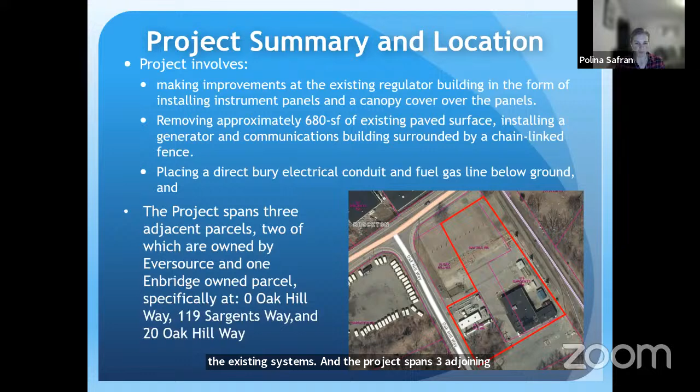The project spans three adjoining parcels: 0 Oak Hill Way, 119 Sargents Way, which are owned by Eversource, and 20 Oak Hill Way, owned by Enbridge. The work is proposed within the 100-foot buffer zone to bordering vegetated wetland only. A small portion of the work is located within the locally regulated 25-foot buffer zone and no-touch zone, and there are no other resource areas within the project area — no riverfront area, no floodplain, no priority or estimated habitats, or vernal pools, certified or potential.

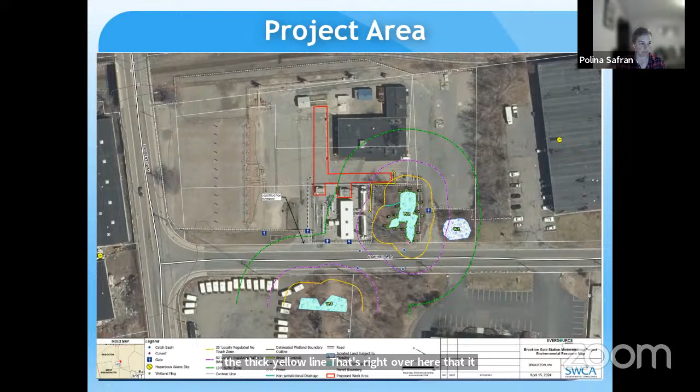The construction entrance will be right over here, which is the main entrance to the facility. And the thick yellow line right over here depicts the erosion controls that will be installed prior to the start of work and will remain there for the duration of the project.

So like I said, the project consists of three main components, and I'll briefly go through each of them. The first is the installation of the instrument panels on the southern side of the Eversource regulator building, located inside the fenced-in Enbridge facility. This work is between the 50 and 100-foot buffer zone, and it qualifies as a minor buffer zone activity. The black box right here is the location where the instruments will be installed.

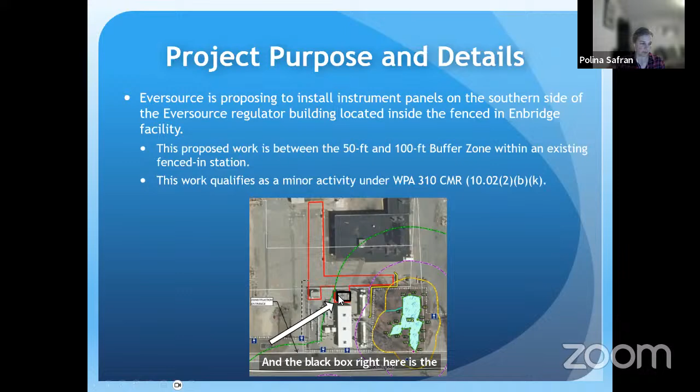The second component is the installation of the generator and communications building. This will involve Eversource saw cutting approximately 20 feet by 34 feet of existing pavement and excavating it. They will be excavating the area using a vacuum truck, which works exactly how it sounds — it sucks up all the soil into a big container, and it'll be hauled off site. Then the area will be backfilled with about 4 feet of crushed stone wrapped in geotextile fabric.

On top of that stone, they will be installing two concrete pads, a 9x4 pad for the generator and a 9x9 pad for the communications building. To protect the generator and communications building, a chain link fence will be installed surrounding the entire crushed stone area. After the installation of the slabs, the total area converted from impervious pavement to pervious crushed stone is about 563 square feet. The black box right here on the map depicts the approximate location of this work.

And the third component is the installation of the pipeline and conduits from the newly installed generator and communications building to the existing Enbridge and Eversource facility located north. Didn't have room for the location, but it's essentially everything else that's right over here. Most of that is within the 50 and the 100-foot buffer.

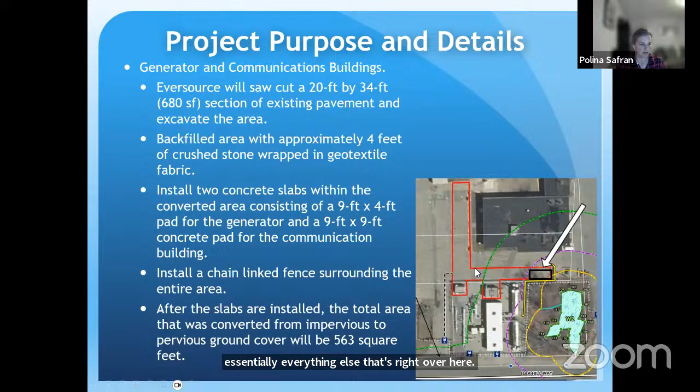The way this is going to be installed is using the open trench direct bury method, which is excavating the trench, about 10 feet wide, 4 feet deep. All soils will be removed using a vacuum truck and hauled off site immediately. Pipe will be laid and joined and then backfilled with clean sand and fill.

No more than 80 to 100 feet of the trench will be open at any time, and usually the trench is filled and area repaved at the end of each workday. If for some reason the trench needs to remain open, steel plates will be placed on top of it. And the proposed trench is outside of the 25-foot buffer.

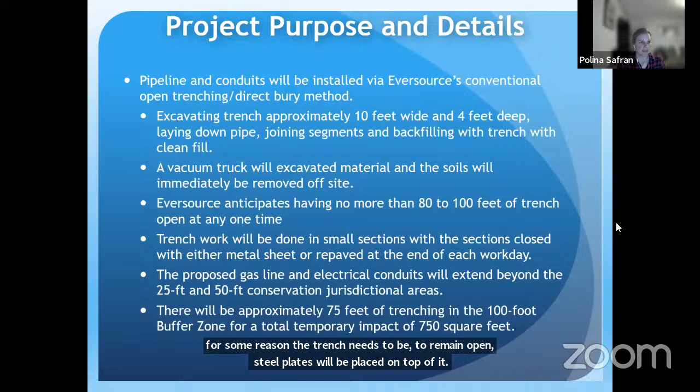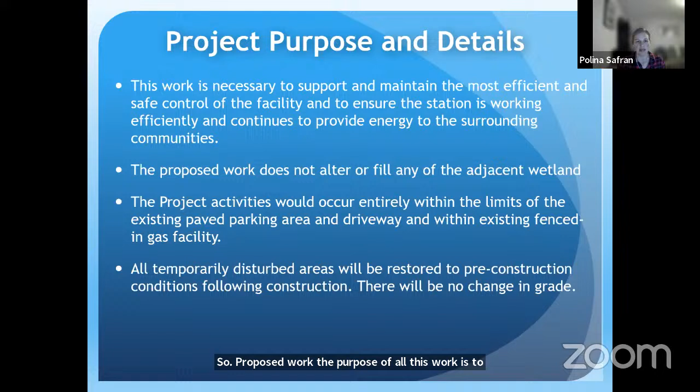So the purpose of all this work is to support and maintain the most efficient and safe control of the existing facility, and also to ensure that the station is working efficiently and continues to provide energy to the surrounding community. Eversource has carefully designed and sited this work to avoid and minimize impacts to the resource area to the greatest extent possible.

Multiple locations were considered, with this proposed location selected as the best alternative because it allows for the safest access to the equipment and fulfills the egress-ingress requirements.

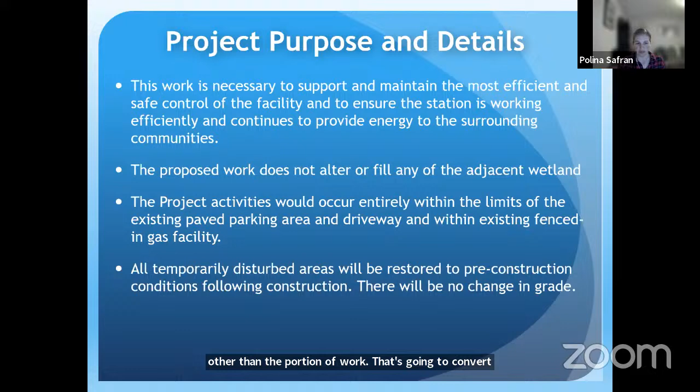The proposed work will not alter or fill any wetlands. All work will occur within the existing paved surfaces within the existing fenced-in facility. There'll be no change in grade, no tree removal, and other than the portion of work that's going to convert pavement to gravel, all other temporary disturbed areas will be restored to pre-construction conditions.

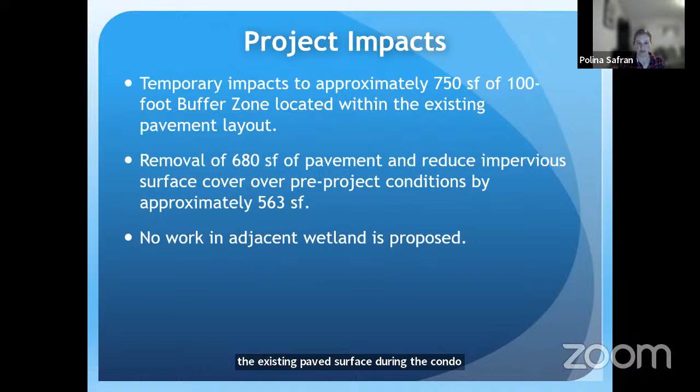So the summary of project impacts: there will be about 750 square feet of temporary disturbance within the existing paved surface during the conduit installation, and there will be the reduction of existing impervious surfaces on site by approximately 563 square feet.

Because the project proposes the conversion of impervious paved surfaces to pervious crushed stone, this project is subject to the Massachusetts Stormwater Standards, which we addressed in the narrative. It's important to note that the project will not result in an increase of impervious area, nor will it result in any grade changes.

And as proposed, the project will reduce impervious surface cover by about 563 square feet, which will be an improvement to the area and will benefit the nearby wetland that currently receives overland flow from the paved surface.

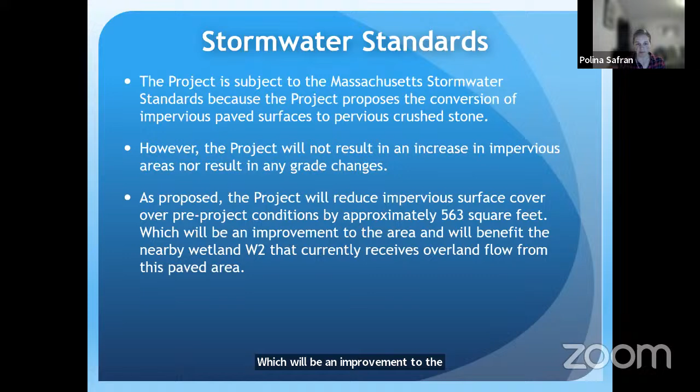So here are the engineering plans depicting the work. As you can see, this small corner right here is within the 25-foot buffer. This is the only corner where it is, and this corner consists of the removal of pavement and replacing with gravel. There aren't any conduits within that 25-foot, or no other work within this 25-foot buffer.

This kind of cross section right here, this is all trench work for the conduits that will be repaved back to existing grade.

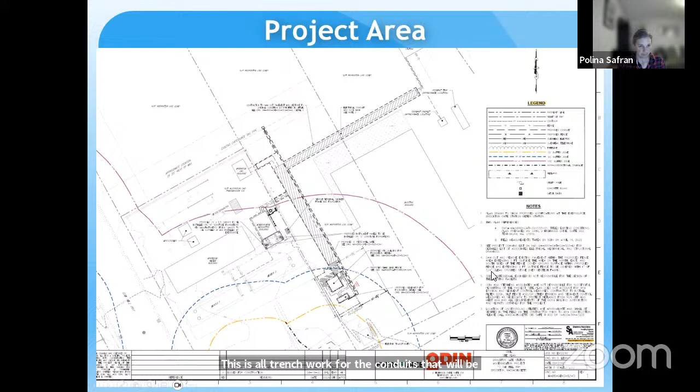Here are some photos of existing conditions. The top left photo is the area where the pavement will be removed. I tried to outline it with the approximate location with that black box. There is an existing fence line surrounding all three parcels, and this fence line will not be touched. It'll be left in place.

The bottom left photo is another view of where the pavement will be removed and generator installed. Erosion controls are proposed along the fence line, so along right here and down here, to protect the wetland. The top right photo is a view of wetland W2 that we keep talking about, and the bottom right photo shows the main entrance to the facility that will be used as the construction entrance.

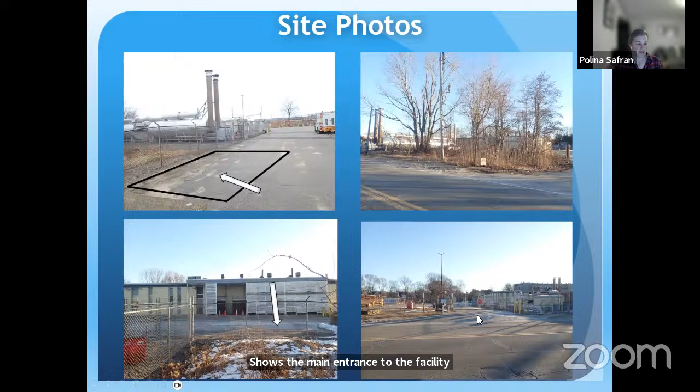So during the duration of the project, best management practices will be applied. Erosion controls and catch basin inlet protections will be installed prior to commencement of work and will remain in place until the disturbed areas are all stabilized and everything's repaved.

There will be no work beyond the erosion controls, no storage of fuels or overnight parking of vehicles within 100 feet of wetlands. And if dewatering is necessary, it will be located greater than 100 feet from any water body and outside of the wetlands.

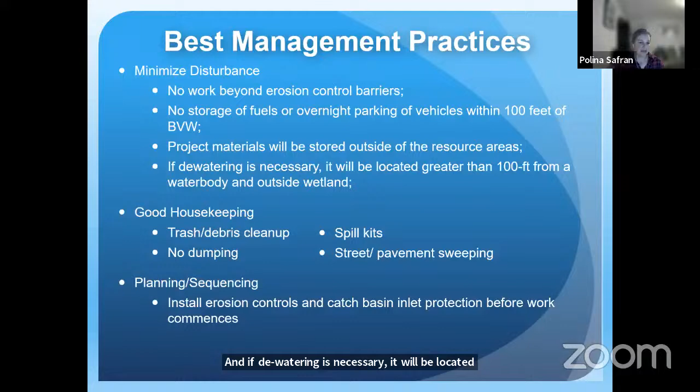And like I said, other than the conversion of paved to gravel, all other disturbed surfaces will be restored to pre-construction conditions, so paved over, same grade. In addition, SWCA will be performing weekly environmental compliance inspections throughout the duration of the project to monitor construction activities for compliance with jurisdictional resources and throughout the site to make sure there's compliance.

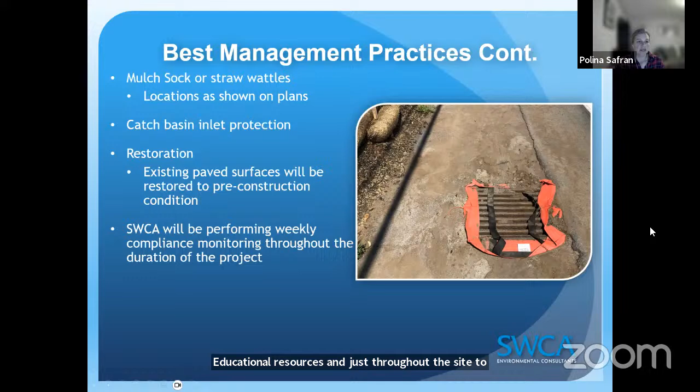So Eversource is hoping to begin this project as soon as possible, hopefully in the spring, and we anticipate it will take about 4 months to complete. Again, best management practices will be implemented for the duration of the project, and all work will be accessed and performed from the existing driveway and pavement layout.

All work will occur entirely within the limits of the existing paved area and the existing fenced-in gas facility, and the project will fully comply with the Wetlands Protection Act. Just a small portion of the proposed work is located within the 25-foot no-touch zone, but it will consist of converting impervious paved area to a pervious one that will promote groundwater recharge. So Eversource is seeking an order of conditions and a waiver pursuant to the Brockton Conservation Commission filing requirements and regulations for this project.

And I know I talked a lot. I tried to fit it into the 15 minutes. So please let me know if you have any questions or if you want to see any slides.

Oh, no, you did great. I also forgot to mention before opening up that I just wanted to confirm that an abutter notification and Mass DEP file number was on file. Yes, we did receive an abutter notification. Proof the abutter notifications were sent, and Mass DEP did issue a file number along with some technical comments about the stormwater report. We can get into that in a minute.

Okay. All right. And any questions for the commission members? I have a question. What is a geotextile material? Yep, so it is a fabric that can allow water to filter through, but it also, if there's any sediment, it kind of captures the sediment, so the water that filters through is fairly clean.

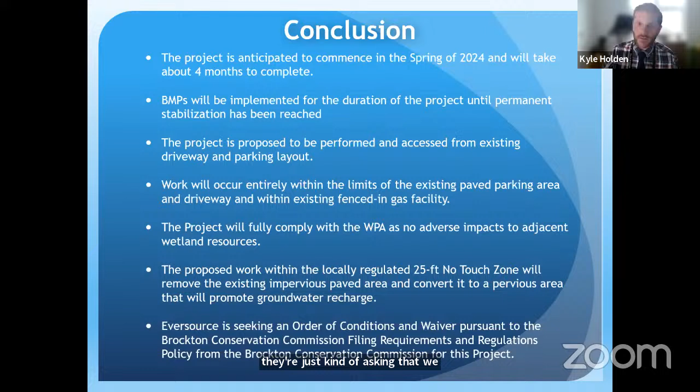So one thing that Polina kind of referenced was at the very end, they're seeking a waiver for one of the local filing requirements. Normally with a notice of intent filing we require the applicant provide the green municipal lien certificate from the city, basically saying there are no outstanding taxes or debts that have accrued on the property. Because this project site comprises two parcels owned by Eversource and a third parcel owned by a different party, they are not sure if they can legally disclose that information, so they're asking that we waive that requirement for this filing. I addressed that in the agent report, and I think there's no problem with that if the commission's comfortable with that.

DEP did issue some technical comments. Basically, DEP stated that the applicant didn't submit the proper documentation for a stormwater report signed by a registered professional engineer. I spoke to someone at DEP about this comment, and they said it's kind of a gray area because there's a low impact as far as we're converting existing impervious to pervious area, and we're not installing anything new. This is classified as a redevelopment project rather than a new development, and they're not installing any new stormwater features.

Whether or not a stormwater report is technically required, it's not included here. The applicant did include a whole section in their application going through the stormwater standards, which is normally what would be included in the stormwater report. So there's kind of a gray area here if the commission is comfortable issuing the order of conditions without that stamped stormwater report, if you are willing to accept the stormwater management practices that were included in the notice of intent application. If the commission does choose to issue an order of conditions, there's always the possibility that Mass DEP will review this and issue a superseding order of conditions if they think the stormwater report should have been included. But again, that's up to the commission's discretion.

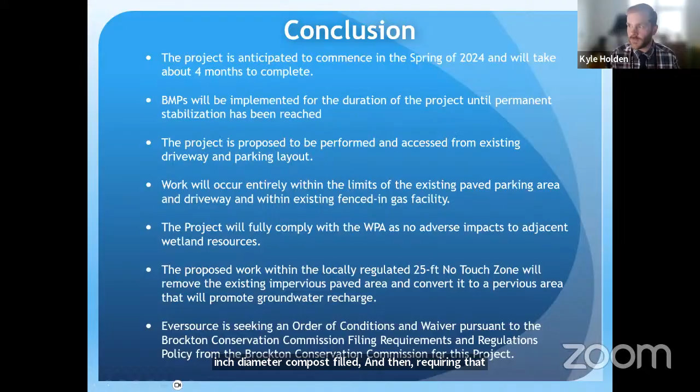Those are at the bottom of the agent report, detailing the type of erosion control. The notice of intent application leaves it up to the commission, so I've stated what we would want: a 12-inch diameter compost-filled biodegradable silt sock, and requiring that the applicant provide the Conservation Commission contact information for their environmental monitor who will be on site every week. And finally, that we're not confirming the wetland boundaries for wetlands W1 and W3, just the BVW wetland W2. That's all I got.

Okay, commissioners, any thoughts from you guys? I have a question for Kyle on the stormwater requirement. Any feedback from you guys? I have a question for Kyle.

I thought I just read recently that we should not be issuing notice of intents if there are still issues that have to be addressed. Did I read that memo wrong?

You may be referring to that document that we just approved earlier tonight. One of the things that's always been a part of the filing information and regulations is that the commission will not issue an order of conditions pending receipt of any additional material. So if they have to provide an updated map or other documentation, it's written into the rules and regulations that the commission will not issue the permit or order of conditions pending receipt of any material. So that's kind of what you may be thinking of. I'm not sure, does that sound right?

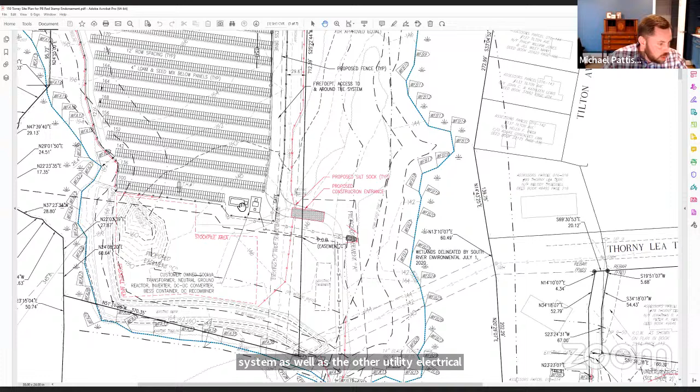As you can see here, in this area there are 2 concrete pads on which the battery system as well as the other utility electrical equipment will be mounted. As you see, there's a small access - there's a 20-foot wide gravel access road right here. Maintenance access would be along this access road here. There's a locked gate off of Thorny Lea Terrace.

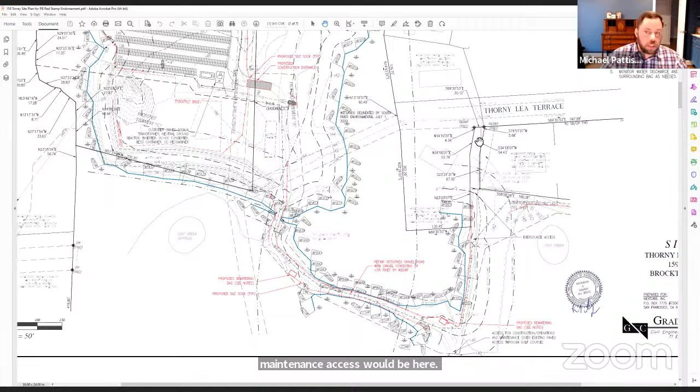So, excuse me, maintenance access would be here. Per the Zoning Board of Appeals, all construction access is going to be through the golf club's cart path from off of West Street. And I can scroll down to that. So here's West Street here. Part of the country club's cart path is here, and it comes west and then up north through it to connect with the property over here. Excuse me, I apologize.

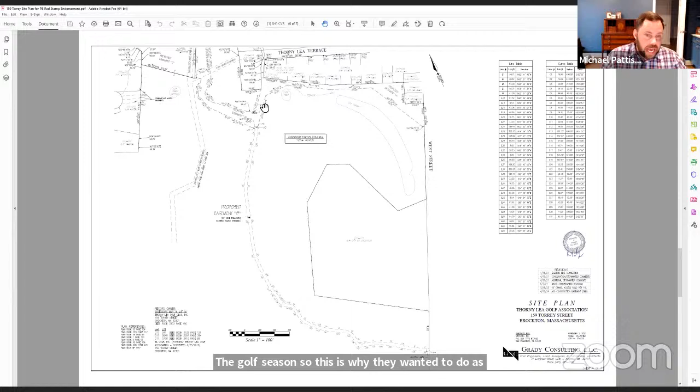As Kyle stated, the country club does not want us doing any type of construction work during the golf season. So this is why they want it done in winter, because all construction vehicles have to access through their golf cart path across their property.

Okay, back to the first page. So as you can see, there is wetlands basically surrounding the property. We are within the 100-foot buffer zone. We are outside of the 25-foot no-touch area.

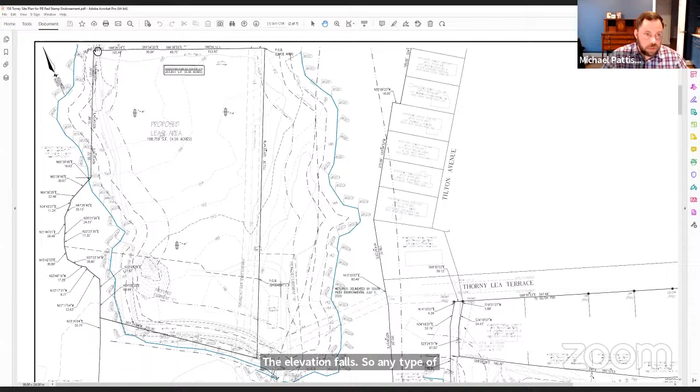Important to note that the elevation falls from the northwest down to the southeast, so any rainwater would flow that direction. In this area there is an existing berm on the southwest that follows the southern side, and currently the water directs into the wetlands.

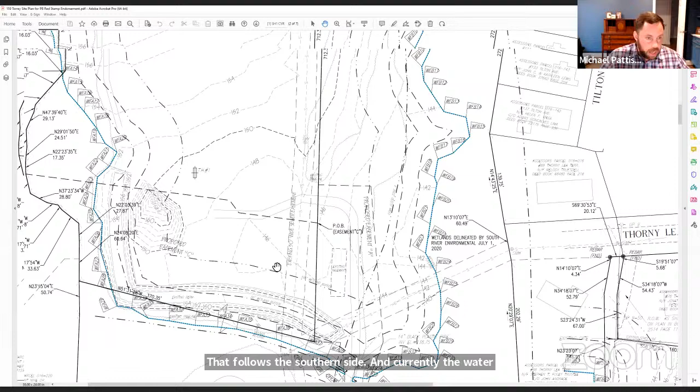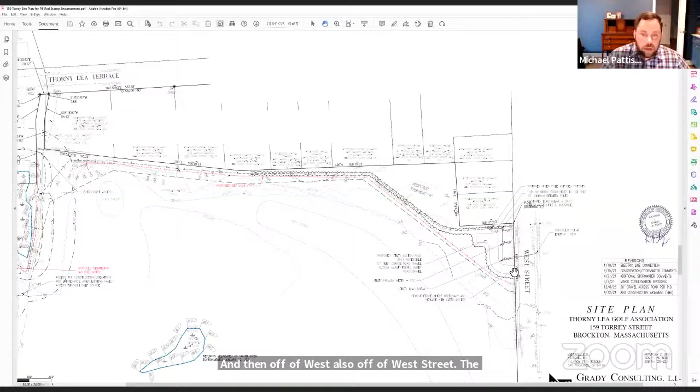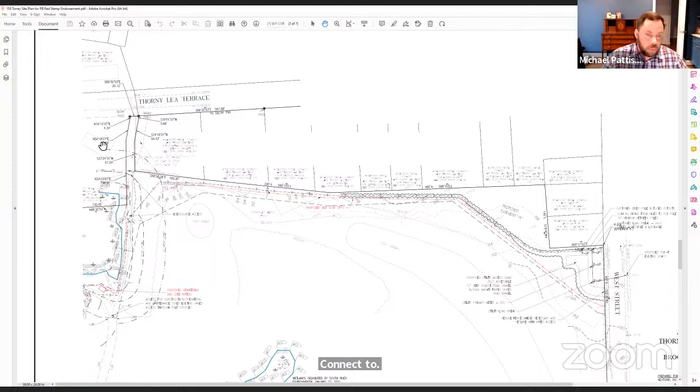Off of West Street, the utility connection would come across part of the country club's property, along the border. It'll be underground from West Street, with multiple poles in this area, then underground along the perimeter of their property to connect to the solar array. So all power created will be diverted from there to the grid.

Okay. Is there any questions I can answer? Any other questions from the commission members? I have a couple questions. One question I had, just because I was curious.

You mentioned there's an existing berm. What is the berm made out of? I believe it's just an existing dirt berm. My understanding, from aerial views, is it looks like a hill covered in grass and other vegetation.

Okay, and then so you mentioned the solar arrays will be ground mounted. Could you talk a bit more about the process of mounting the solar arrays and how that affects the grading and the ground?

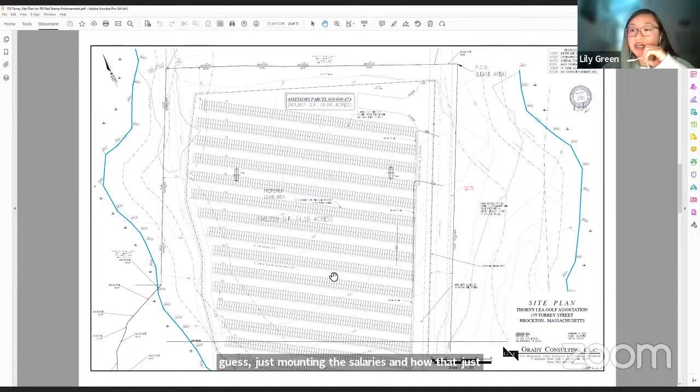My understanding is, and I apologize, I have my engineer here. If he could raise his hand we could give him access, he'd be able to talk about the civil work. Rick, could you raise your hand so they can see you? Yeah, I'm promoting him right now.

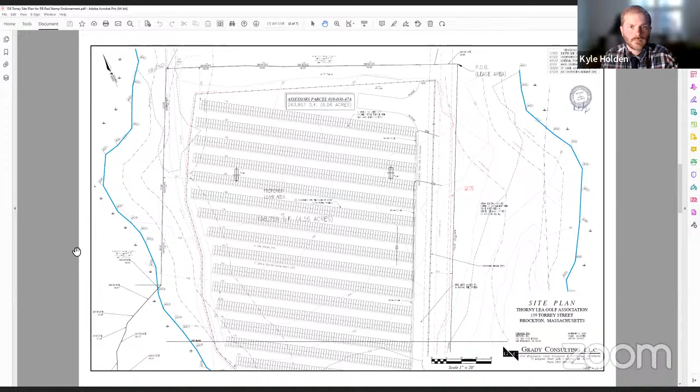Okay, all right, he may be having some difficulties. I know he was at another hearing somewhere else, so he's currently sitting in his car in a parking lot trying to access the meeting.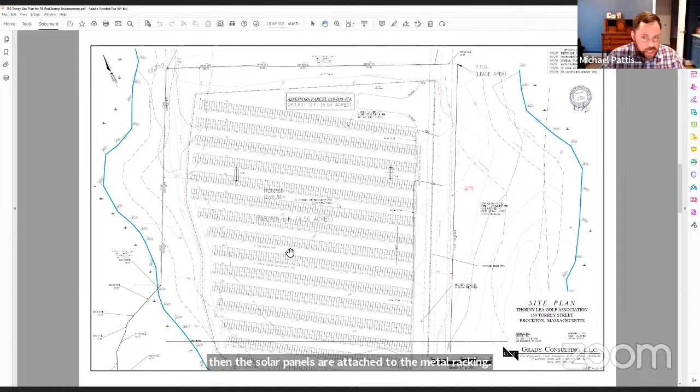So I apologize. Usually what happens is they dig boreholes and insert concrete piers into the ground, then attach a metal racking system connected across the property, and the solar panels are attached to the metal racking. Regarding grading, I believe it's quite limited—we're trying to disturb as little of the area as possible.

I may be on here now, Mike. Is this working now? Hey, there he is. Sorry about that. Oh, no worries.

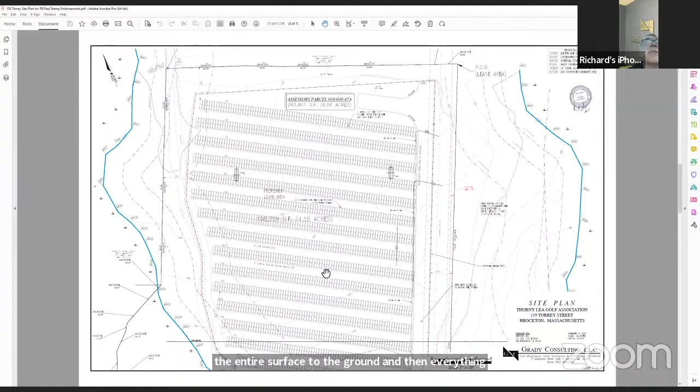As Mike mentioned, we're not making any drastic changes to the existing grade. We do want to scrape off some of the loam to put in the connections to the ground, and everything gets covered with crushed stone over the entire surface. We also carve in a couple of drainage basins. During the review and approval 3 years ago, we submitted stormwater calculations demonstrating no increased runoff for the 2, 10, 25, and 100-year storm events. We did provide attenuation with some storage and infiltration on site.

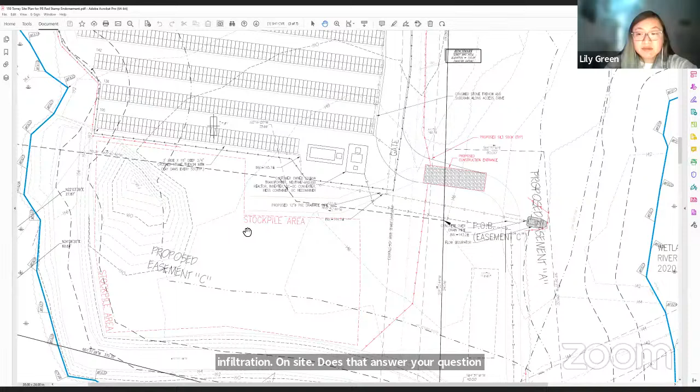Does that answer your question? Yes, thank you. You're welcome. Are all commissioners satisfied with the responses we've received?

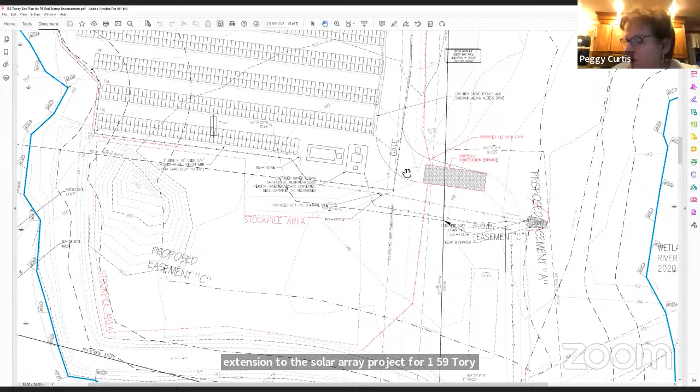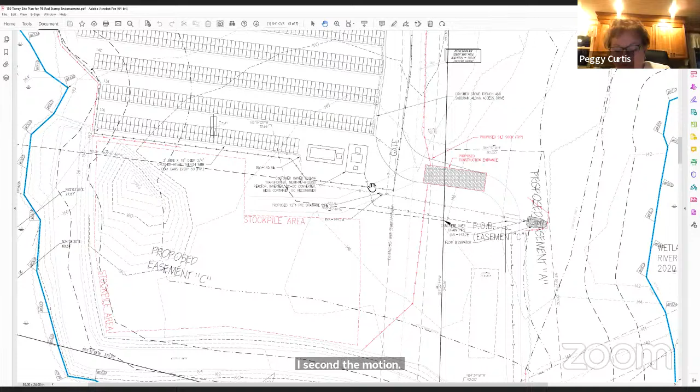So I'd like to hear a motion to provide a 3-year extension to the solar array project for 159 Torrey Street. I'll make a motion—plus it went right out of my head—to do a 3-year extension for 159 Torrey Street. I second the motion. Roll call vote please: Curtis, aye. Green, aye. Map, aye. Clay, aye.

So Kyle, the 3-year extension would just be till 2027, correct? Yeah, that sounds right. Okay, 2027.

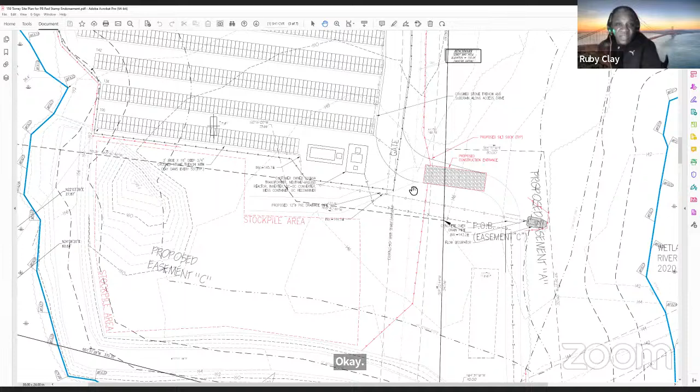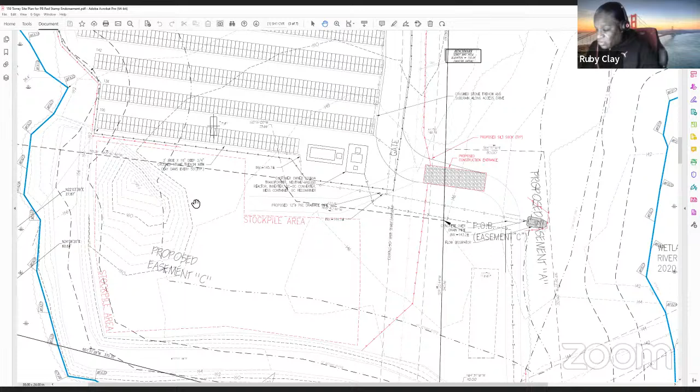So now, oh yeah, so number 5 is extended to the May meeting as well as number 6. So I think now we're at 7, the ANRAD for 0 Toby. Yes, that's correct.

All right, hold on one second, let me just get myself together here. And the confirmation that abutters are notified and all that—this is a continuing matter, right. Okay, right, so we've already done that when this was first opened last fall. Yep, and I know one of the engineers is here from W Engineering, so I'm going to go ahead and promote Evan.

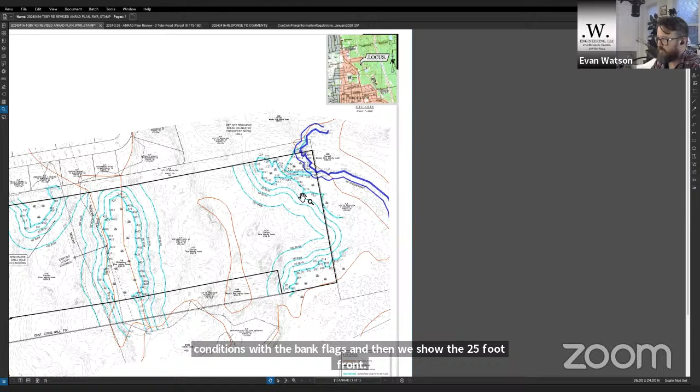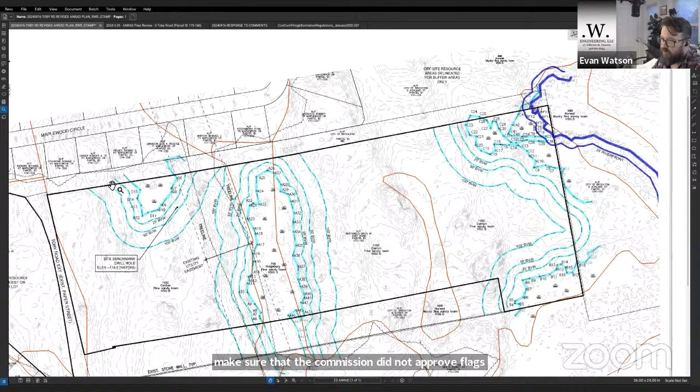So Beta had a few comments. First, they wanted to make sure the commission did not approve flags that were off the property. So we've revised the plan to show those flags in grayscale to help with that, and I think they had a recommendation of which flags not to include.

Another thing they asked us to look at was this ditch in the D series over here. DEP brought it up as well, however it's off the property, so if we delineated it, it wouldn't be approved anyway since it's not on the property. It's not a perennial stream, and there's no riverfront associated with it—it would just be an intermittent stream within a resource area.

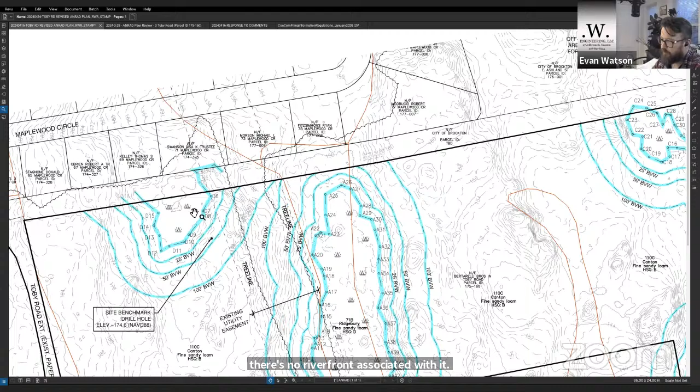The other spot they mentioned was a small ephemeral flow here at C33. Again, it's within this BVW, the C series, so delineating that wouldn't necessarily increase the limits of the resource area delineation. They recommended the commission cite in the ORAD that it exists but wasn't delineated because it's within the resource area anyhow.

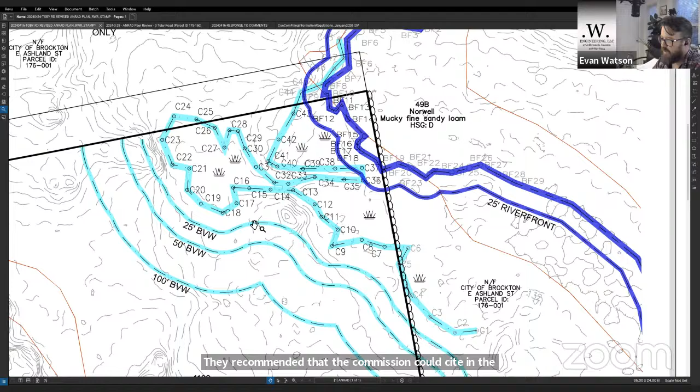I think they also mentioned there was some standing water somewhere in the A series that may or may not be a potential vernal pool. They recommended the commission note that it has not been evaluated, which we're fine with as well.

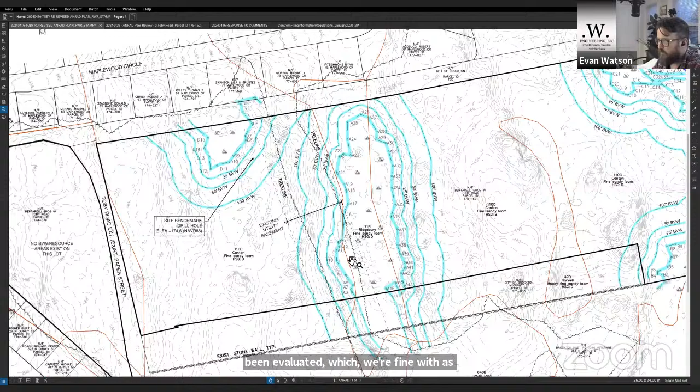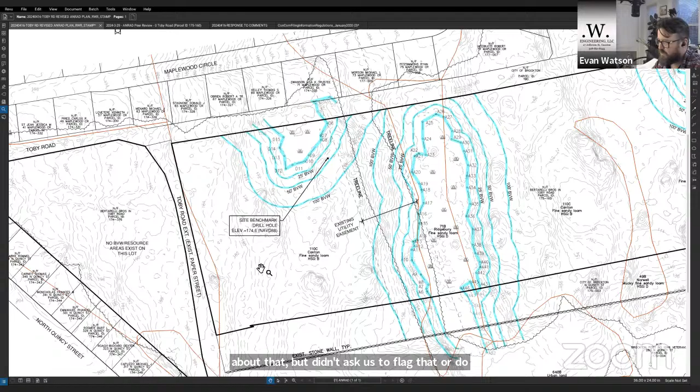Lastly, they indicated there may be some small area—I don't know exactly where, but I suspect it's these little puddles right here that had some wetland vegetation, but it was small and not connected to another resource area. It doesn't border any other resource areas, so it's an isolated non-jurisdictional area. They spoke about that but didn't ask us to flag it or do anything since it would just be a non-jurisdictional wet area.

I believe Kyle took a look at the plan and the recommendations and had a report as well, so I'd be happy to hear that report and then answer any questions the commission may have, or hear any input from abutters.

Evan did a pretty good job of summarizing Beta's comments. In my agent report I just kind of rehash exactly what Evan said as far as Beta's suggestions regarding what findings the commission should issue. Those are all listed on the agent report. Evan went through each of those things just now, so I won't rehash that. Everything else Beta commented on was more administrative, and all of those concerns have been addressed, so I think the commission has the information required to issue the order of resource area delineation.

I'll just make a comment that Elyse is here from Beta if the commission has any questions for Beta specifically. Also, before we close the hearing, we should open this up for public comment. Okay, any commissioners have any questions or comments?

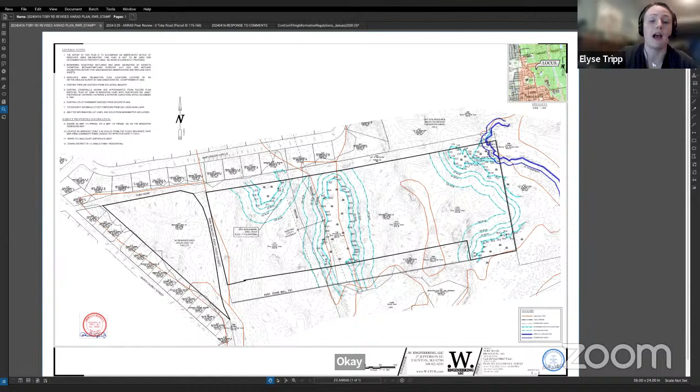Yes, I just wanted to make one point of clarification. Evan did summarize everything. I did see the plans and we agree with everything. So the isolated wetland observed on site is not WPA, Wetlands Protection Act jurisdictional, but it is still considered a water of the Commonwealth, which is something we suggested be reflected in a special condition. So just to clarify, it's not Wetlands Protection Act jurisdictional, but it is jurisdictional under the MA Clean Water Act, Section 401. As far as this issuance of an ORAD is concerned, under the Wetlands Protection Act regulations, it would be non-jurisdictional. But that was my only addition.

Thank you, Elyse. Yep, thank you. Any public comments?

Yes, we have Councilor Lally. Let me promote him to panelist.

All right, I'm here. Can you hear me? Yes. Man, that promoting to panelist suspense is crazy.

I'll be brief. I want to express my appreciation to our conservation agent and the Conservation Commission for their effort and due diligence. This isn't a project, at least for now, but after the last couple of meetings we've had, the applicant's lawyer contacted me before any plan is proposed. I've asked them to agree to a meeting with the neighbors to hear their concerns and input. So just wanted to make that known to the commission and express my appreciation for your efforts. Thank you.

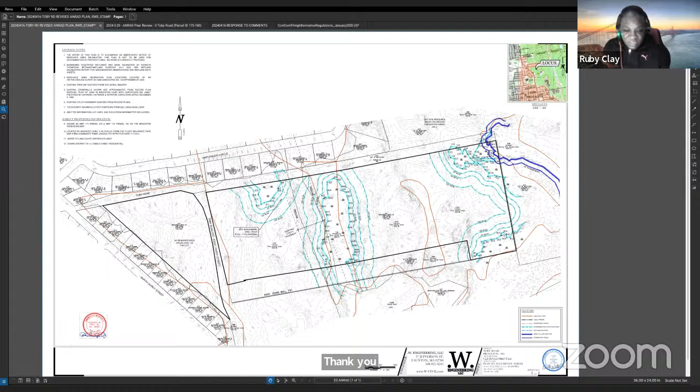I'll make a motion to issue an order of resource area delineation for 0 Toby Road. I second it. Roll call vote please. Curtis, aye. Green, aye. Snap, aye. Clay, aye.

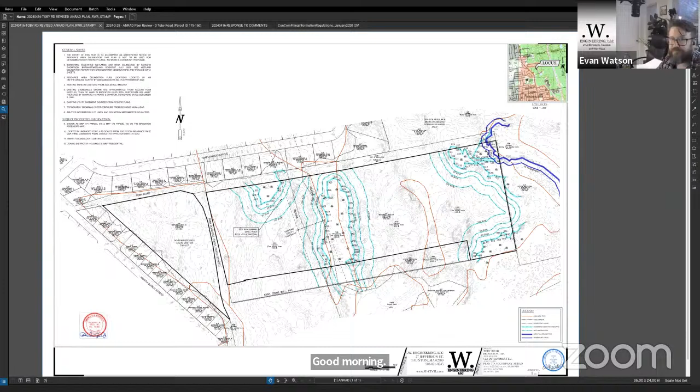Thank you very much. And just for the record, that's to include the findings issued in the agent report. Those will be included, correct? Correct. Okay, thank you.

Okay, have a good night. Thank you everyone. Yes, thank you. Thank you. Thank you.

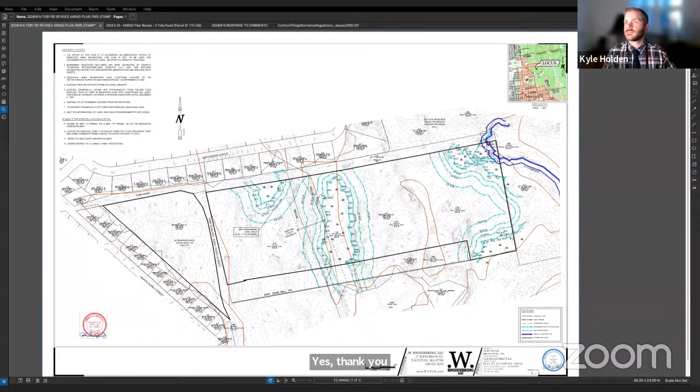All right, and then looks like number 8, 9, 10, 11, and 12 are all continued. So that brings us to 13 and 14 as well, I'm sorry. And that brings us to the enforcement orders.

Yeah, that is correct. I've got a couple updates for the commission on a couple of these. So the first one, if I may, number 15, which is 1507 Main Street. Yep, so this is the Brewster's ambulance property that kind of paved a wetland area in the back. We've been working with them to get a restoration plan put together. They had an environmental consultant go out on site and develop a report to see what damage has been done, what the current state of the property is, and a couple potential pathways of remediation they could go down. That's where we were about a month ago.

Since then, you may recall this was kind of a dispute between the property owner themselves and the neighbor who actually did the work, because the neighbor had asked if they could park some trucks on their lot, and they actually did this extension themselves.

So it's actually going to be the neighbor who is doing the work. I was just in contact with the representative from Brewster Ambulance, who's managing this for them, and he had been in contact with the neighbor. The neighbor was going to have a relative come down and handle everything with a backhoe over the weekend, so thankfully we put a stop to that. The Brewster Ambulance representative informed the neighbor that there's a whole process to this, and put the neighbor in touch with the people who did the restoration report initially. Hopefully the people who did the environmental evaluation will be on site in the next week or so to begin developing that restoration plan, and fingers crossed we may get that next month. But that's kind of where things are. So we are moving in a positive direction with 1507 Main Street.